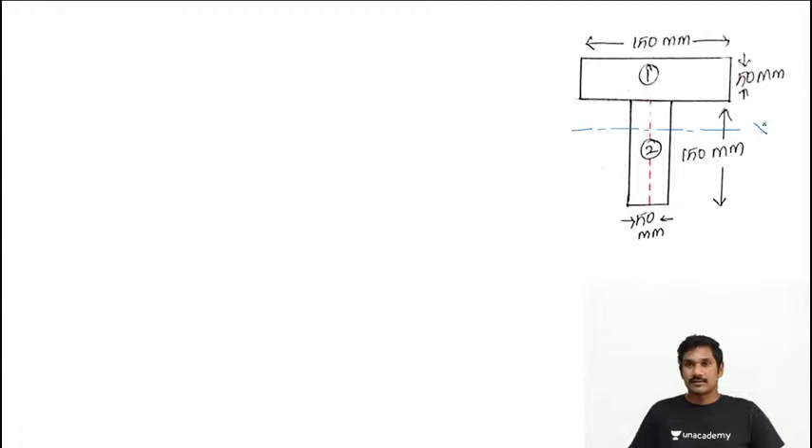After drawing the XX axis, find whether it is symmetry or not - find the section which is symmetrical about XX and YY axis. If you check about YY axis, yes, the T section is symmetrical on both sides. But if you check about XX axis, no, it's not symmetrical, because on top side we have a flange, and on bottom there is nothing. So about the T section, it's not symmetrical about XX axis.

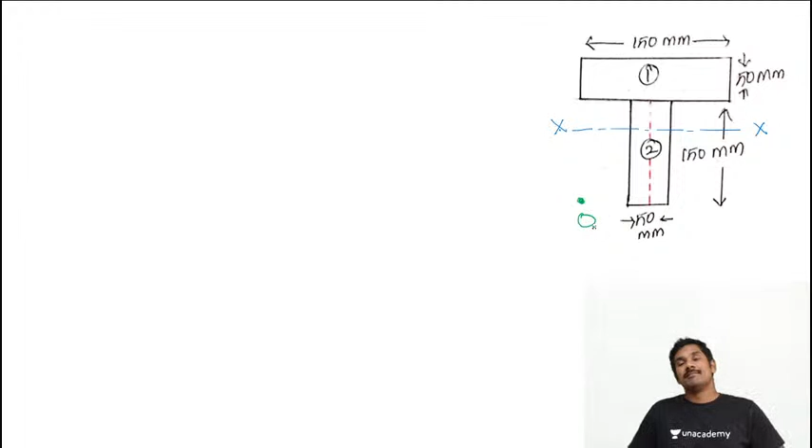According to that, the next step is to mark the origin point O. Next thing, find the area.

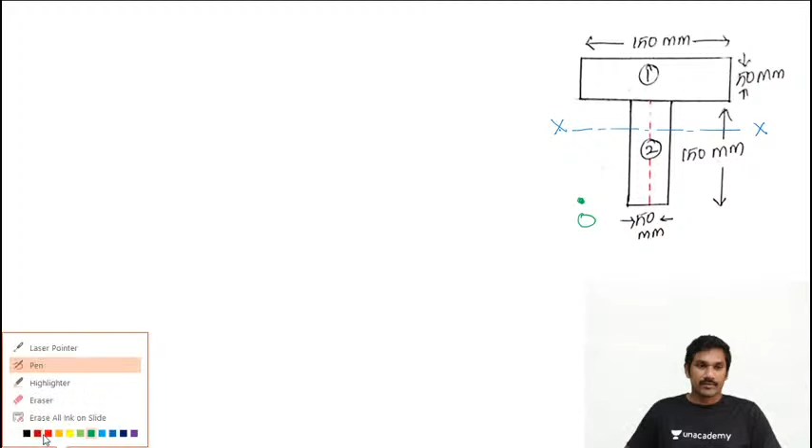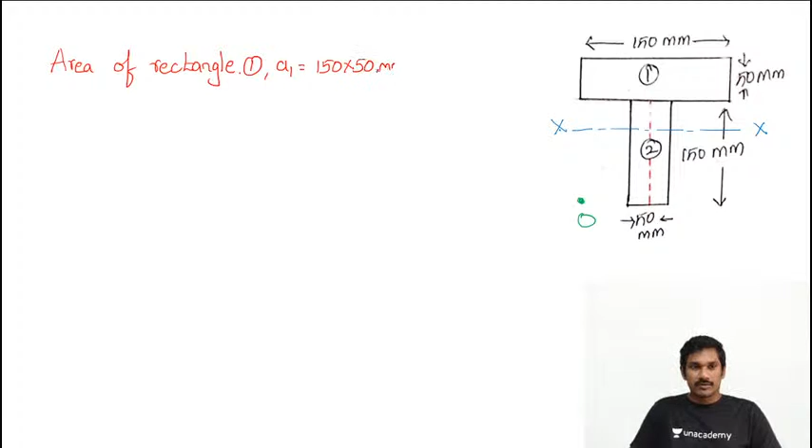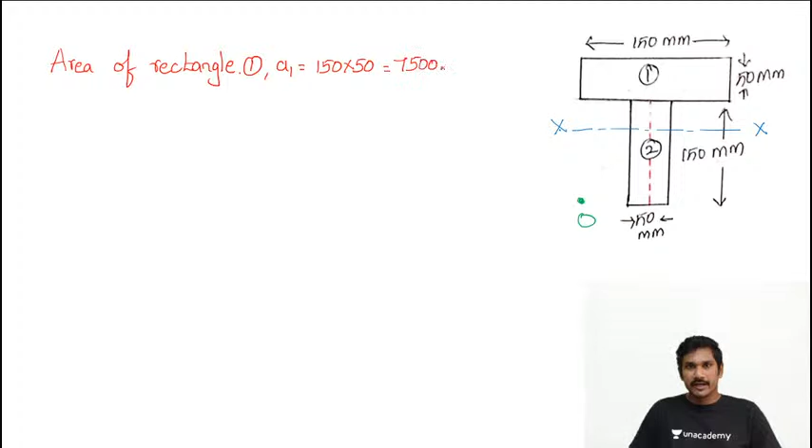Area of rectangle 1, A1, is equal to 150 into 50, that is 7500 mm square. Next, area of rectangle 2, A2, is equal to 150 into 50, that is 7500 mm square. That's the first work.

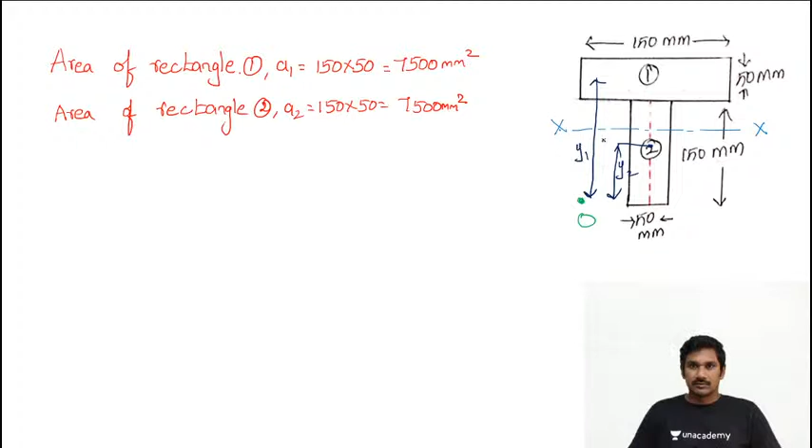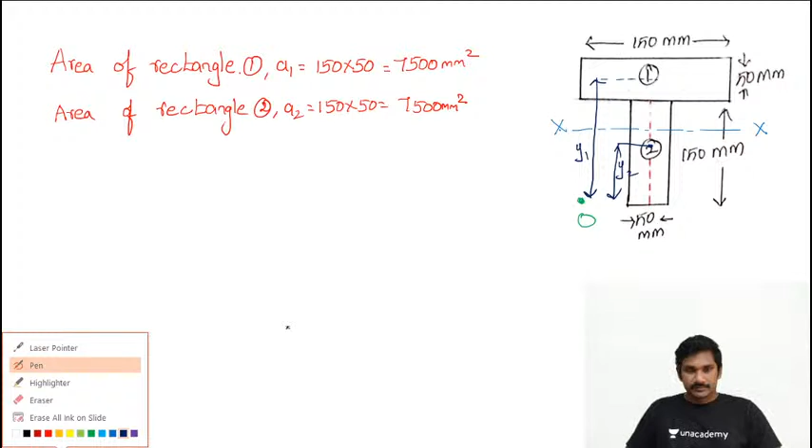Next work is y1 and y2. If this is the CG, then you have to calculate y1 and y2. y1 means from the origin O to 150 plus 50 by 2, that is 25, so it is 175 mm. Y2 value is 150 by 2, that is 75 mm.

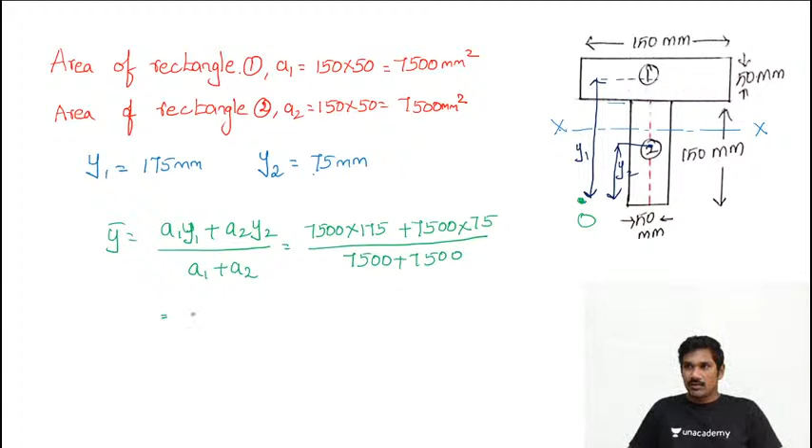Based on this, now calculate the y bar value: y bar equals a1 y1 plus a2 y2, divided by a1 plus a2. So the values are 7500 into 175, plus 7500 into 75, divided by 7500 plus 7500. So the y bar value is 125 mm. Now what is this 125 mm? From the origin, the height of x axis is 125 mm.

And exactly at the meeting of x and y axis, you get the center of gravity of the total section. So now you have calculated the y bar, and from there the CG of the whole T section is calculated. So well and good, nice.

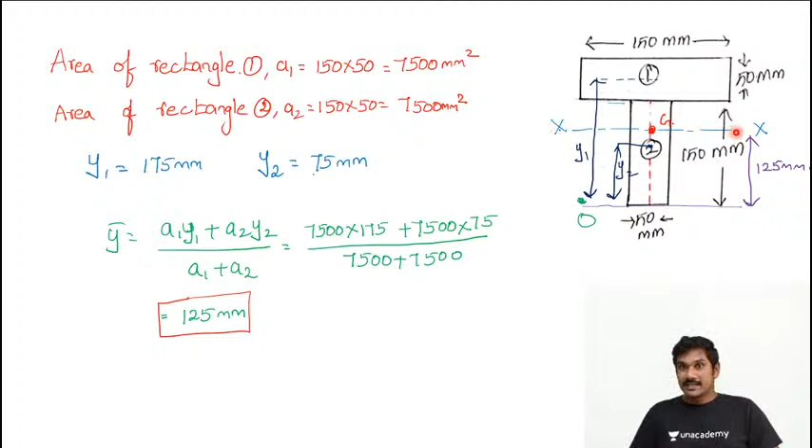Now what you have to do - you have to calculate the moment of inertia. The first step, we have calculated the center of gravity, now we move into moment of inertia. For that, again we split into two rectangles, rectangle 1 and rectangle 2, and we do it for both axes, about x axis and about y axis. About y axis, the component is symmetrical so it's easy to calculate, but about x axis it's not symmetrical. So let us calculate it here.

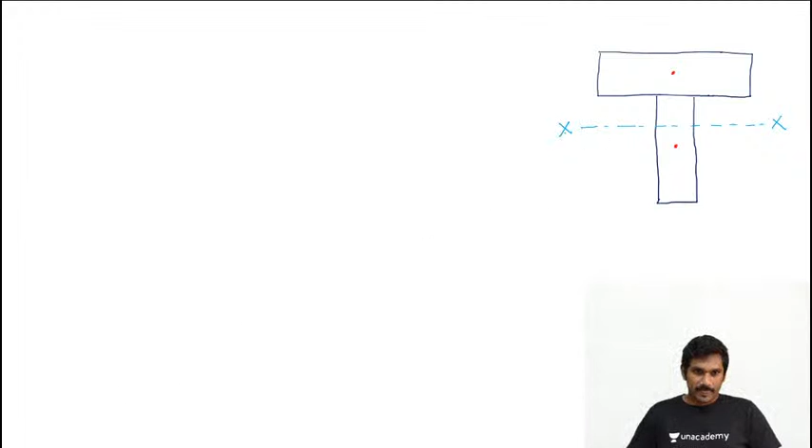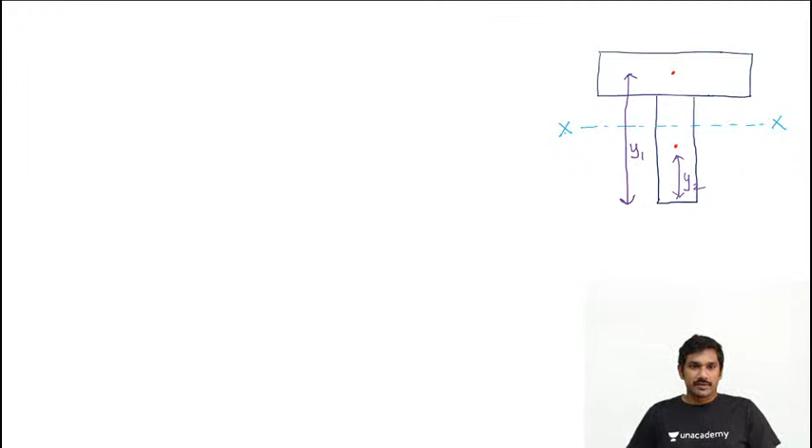So xx, y2, y1. This height is 125. 175 and 75. So now it's clear, so it's easy to do it.

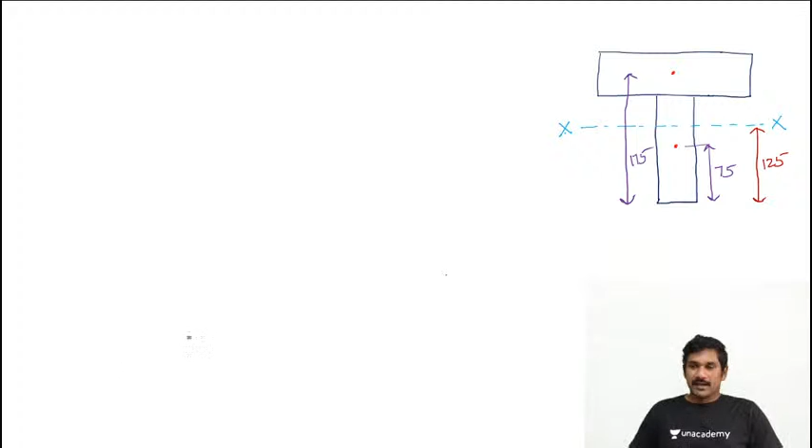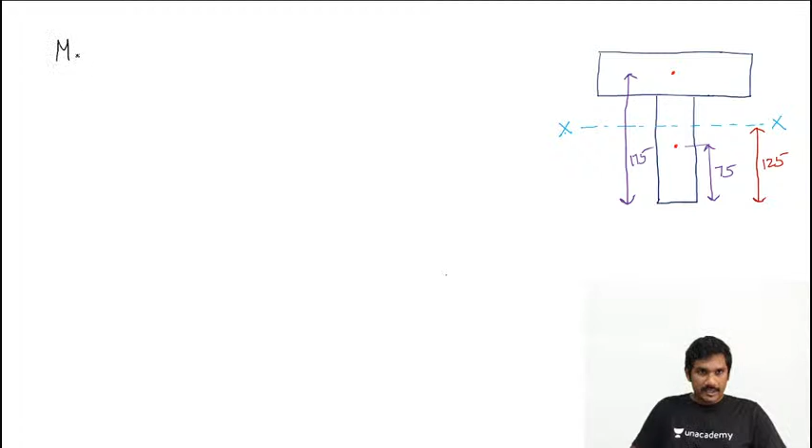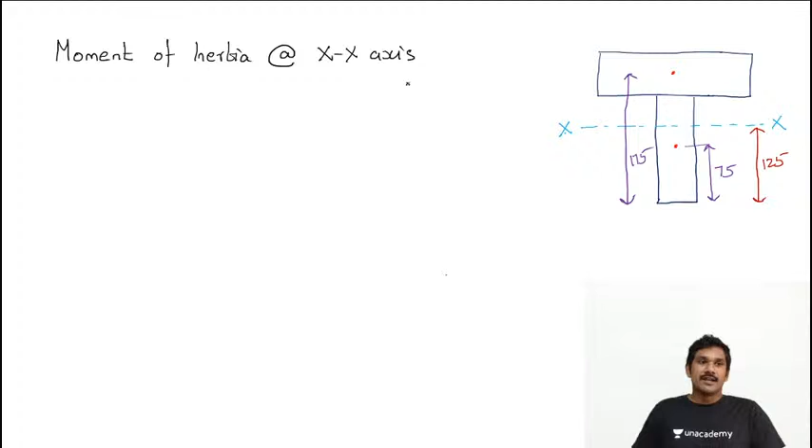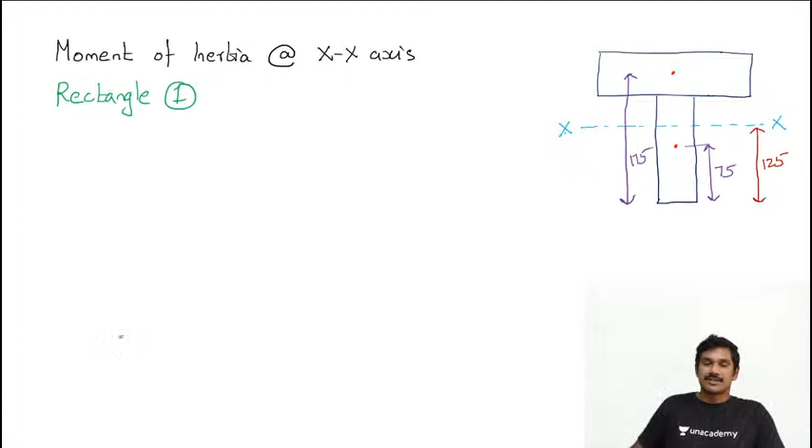Now going to moment of inertia. Before moving to moment of inertia, first we are calculating moment of inertia about x-axis. Our first approach is about x-axis alone, we are not going to do y-y first. Our first aim is to find it about x-axis. For that, the first step is rectangle 1 - in the x-axis calculation, the first step is about rectangle 1.

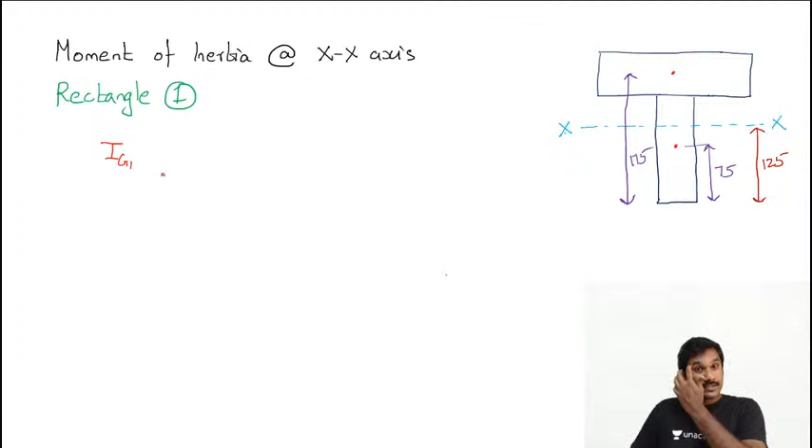First, IG1. What does IG1 represent? Moment of inertia about its own center of gravity of rectangle 1 about the x-axis.

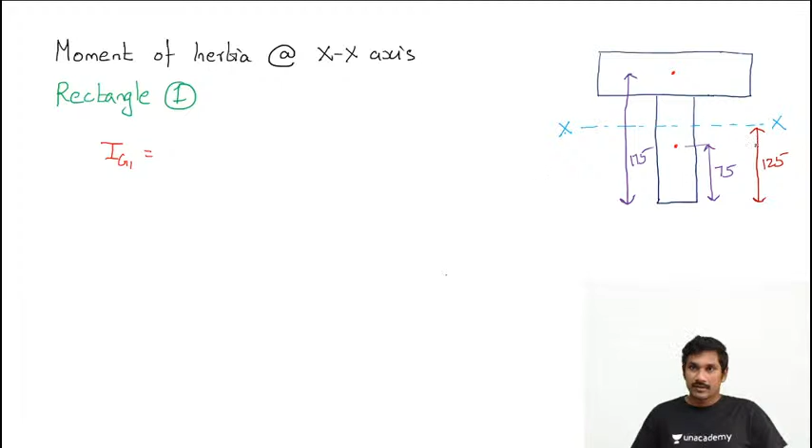So rectangle 1 is here, rectangle 1, rectangle 2, right? So rectangle 1 about its own CG is here, and rectangle 1 about its own CG from the x-axis. That's the first point.

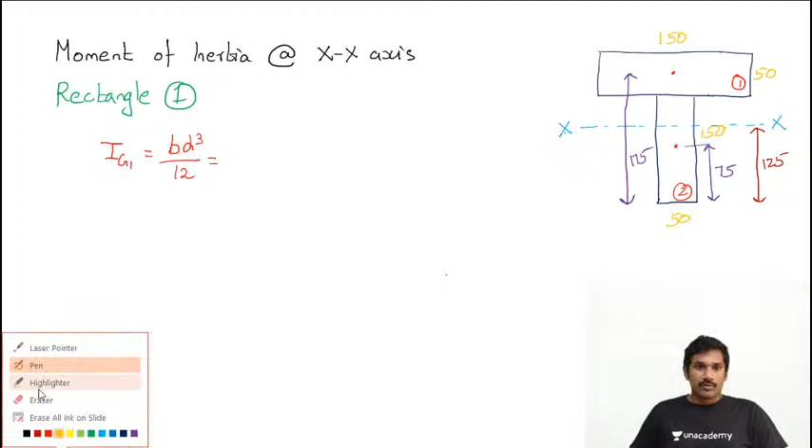About its own axis means BD cube by 12, where breadth and depth values are 150 and 50. So this is 50 and 150. Now, 150 into 50 cube, that is breadth into depth, 150 into 50 cube by 12. So BD cube by 12 is the moment of inertia equation for a rectangle.

So from there, if you calculate it, you get the answer: 1.5625 into 10 power 6 mm power 4.

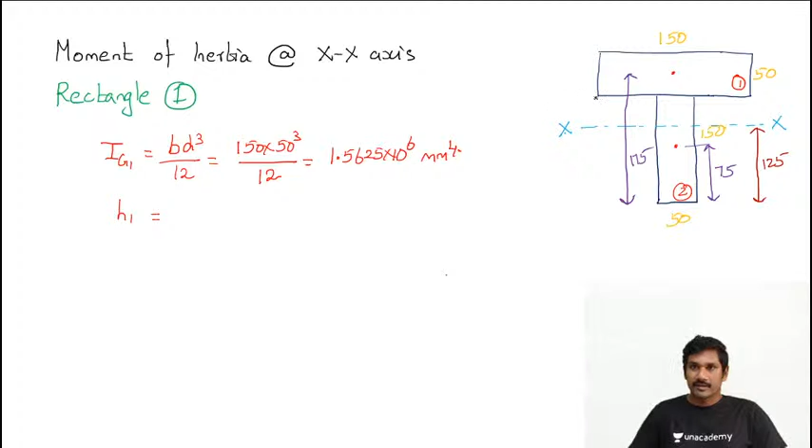Now, next you have to calculate H1. What is this H1 value? From the x-axis to the CG, this is H1. From the x-axis to the CG of rectangle 1, this is H1.

From the origin, the x-axis height is 125. From the origin, CG of the first rectangle is 175. So 175 minus 125 gives us the H1 value, which is 50 mm.

Now we have the value of H1. Finally, with these values, for rectangle 1 about the x-axis: IG1 plus A1 H1 square. So IG1 plus A1 H1 square is 1.5625 into 10 power 6 plus A1, the area, already calculated. Both areas are the same, that is 7500 into 50 square.

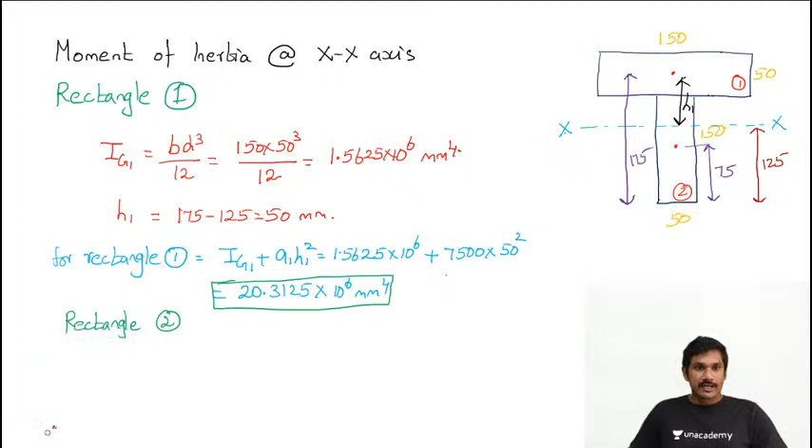Next, rectangle 2. For rectangle 2, same IG2 equals BD cube by 12, let's take it as B1 D1, this is B2 D2 because of rectangle 2. So for the second rectangle, breadth is 50, depth is 150. Which means 50 into 150 cube by 12, that is equal to 14.0625 into 10 power 6 mm power 4.

Next is H2 value. What is H2 here? From the x-axis up to the CG of the second rectangle. So this part is H2.

H2 means from the origin the x-axis is 125, and from the origin the CG of the second rectangle is 75. So how can we calculate? 125 minus 75, that is 50 mm. So now we have calculated these two values.

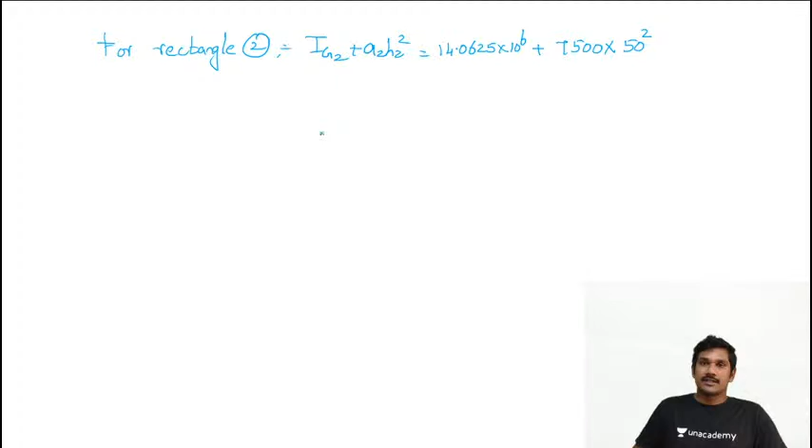So obviously for rectangle 2, IG2 plus A2 H2 square, that is 14.0625 into 10 power 6 plus second rectangle area 7500, H2 value 50 square. So the final value is 32.8125 into 10 power 6 mm power 4.

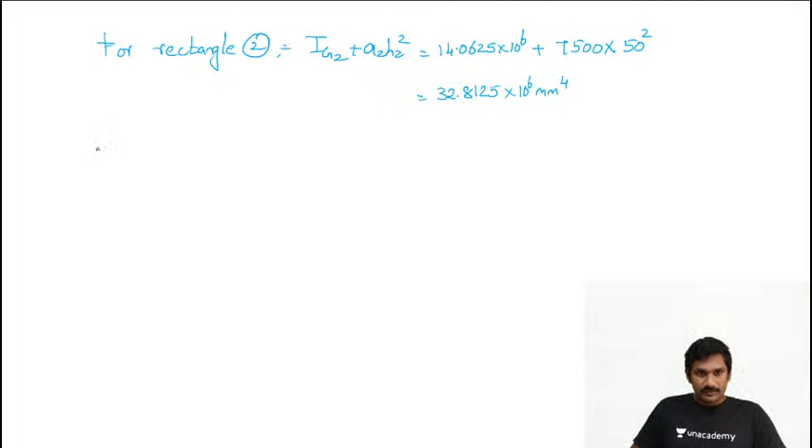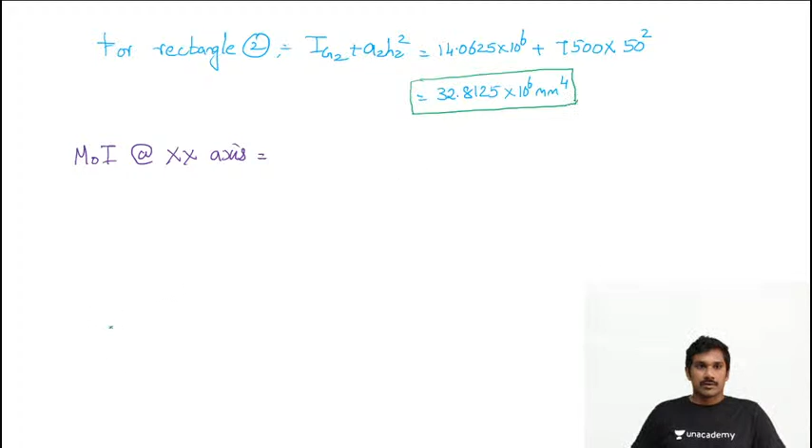So here the final answer, moment of inertia about the x-axis, is equal to first rectangle plus second rectangle. Which means 20.3125 into 10 power 6 plus 32.8125 into 10 power 6, that is equal to 53.125 into 10 power 6 mm power 4. So this is the moment of inertia about the x-axis.

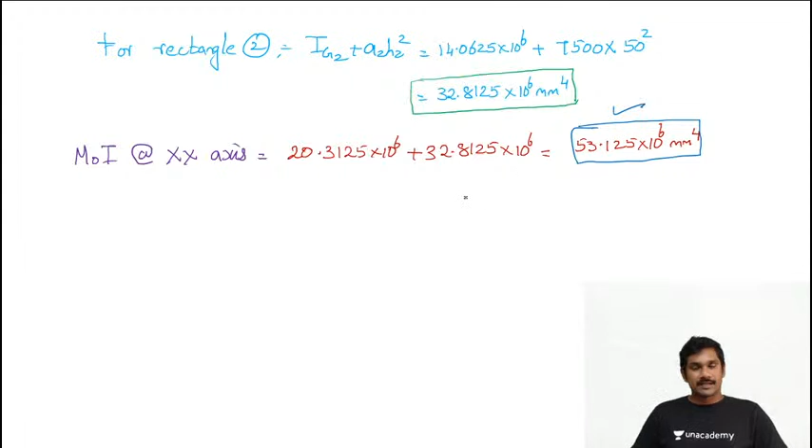Now next part is moment of inertia about the y-axis. This is a very simple one, because about the y-axis the component is symmetrical. So you don't need the value of h1 and h2. If h value is not there, then moment of inertia about its own axis is enough, so we can simply calculate.

So based on that, for rectangle 1, Ig1 is d1 b1 cubed by 12, because it is about the y-axis. About the y-axis, depth into breadth cube is the right representation. So depth is 50, breadth is 150, which gives 50 into 150 cubed by 12, that is 14.0625 into 10 power 6 mm power 4.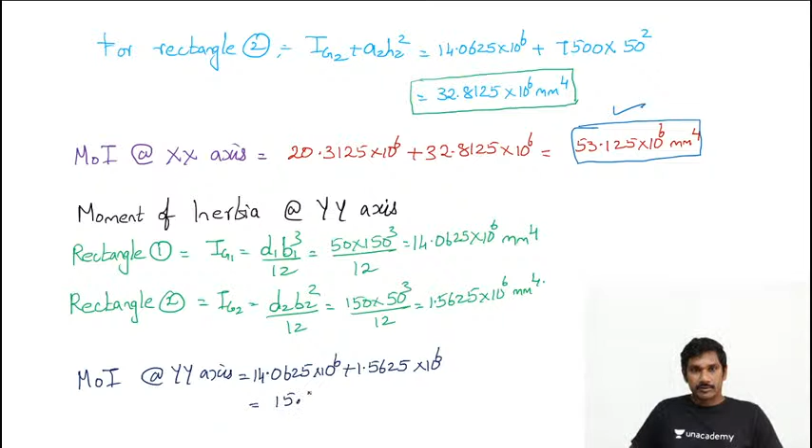So moment of inertia about the y-axis is the sum of these two: 14.0625 into 10 power 6 plus 1.5625 into 10 power 6. So the total value is 15.625 into 10 power 6 mm power 4.

This is the final answer here, right? So one of the simple methods, if you understand the concepts, it's very easy to answer. So it's simple and easy, but you have to do practice. Multiple practice will help you avoid errors. If you don't practice, errors may occur. So do practice to avoid errors.

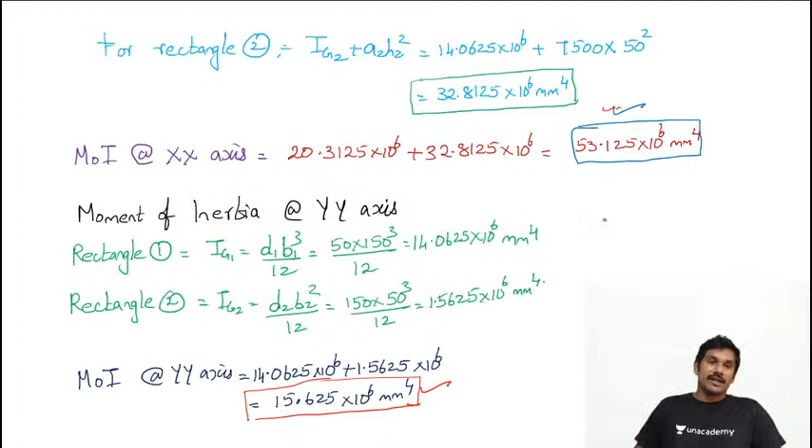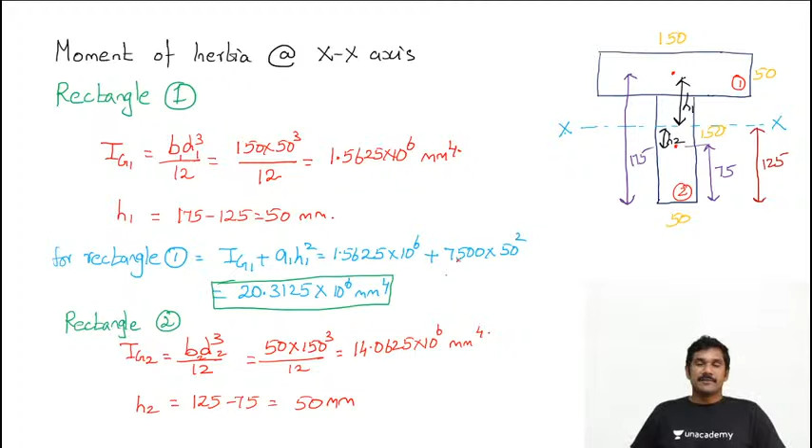So this is about the y-axis, and this is about the x-axis. In this question we calculated moment of inertia about both x-axis and y-axis. In case any other axis or plane is specified, how do we calculate it? Let's do the next problem.

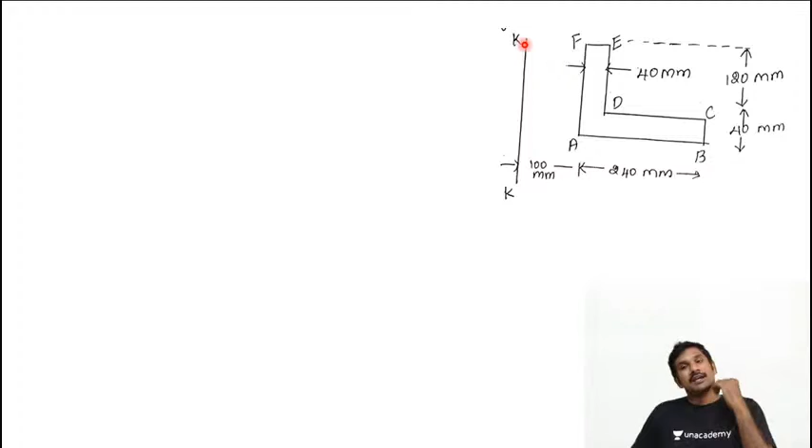So here you can see this is a specific problem where you have to calculate moment of inertia about KK. A specific plane is provided, and based on that plane you have to calculate the moment of inertia. That's the question.

Now, when a specific plane is provided, you don't need to find the center of gravity for the whole component. Just find the CG of each part on its own, that is enough. Let me do it.

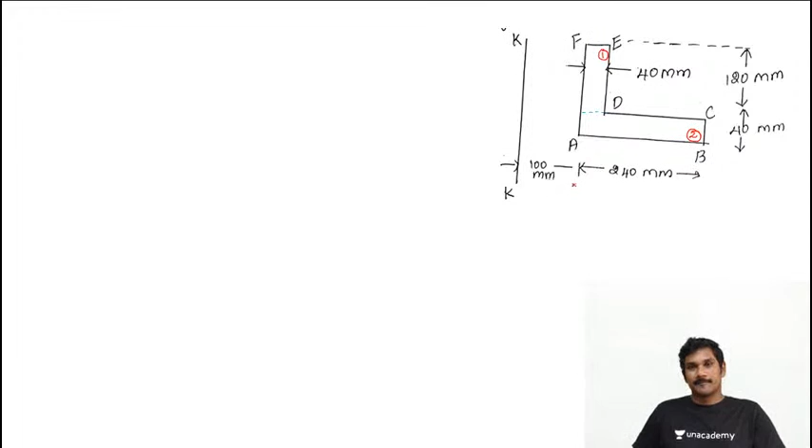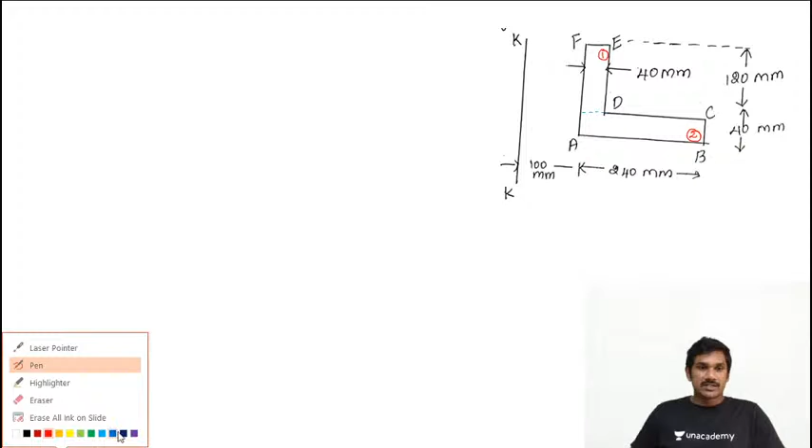First, split into simple shapes: rectangle 1 and rectangle 2 are marked. Next, draw the x and y axes to check symmetry. Since we don't need the overall center of gravity, we omit that step. Just find its own CG for each rectangle.

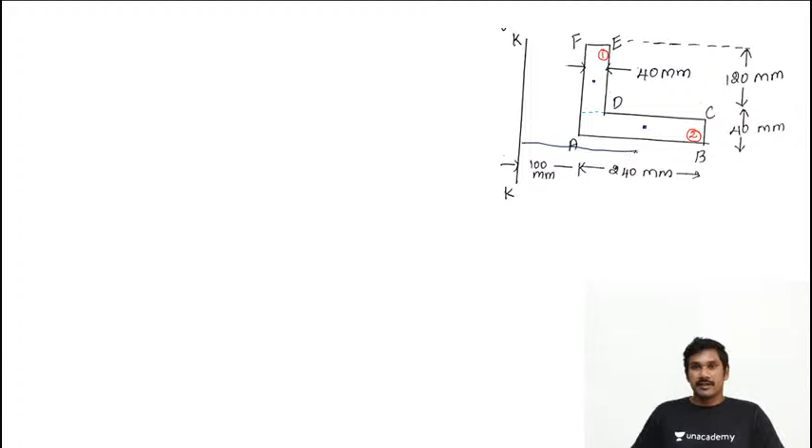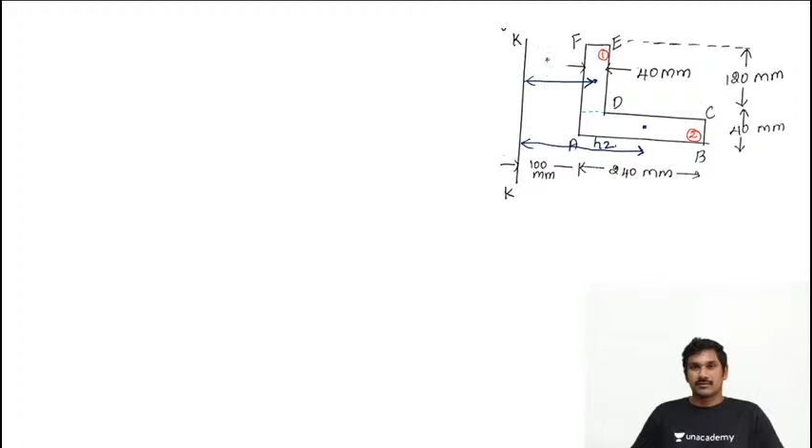Find the length H1 and H2. Once H1 and H2 are calculated, we find the moment of inertia about its own CG, and then use these values to calculate about KK. Let's move on.

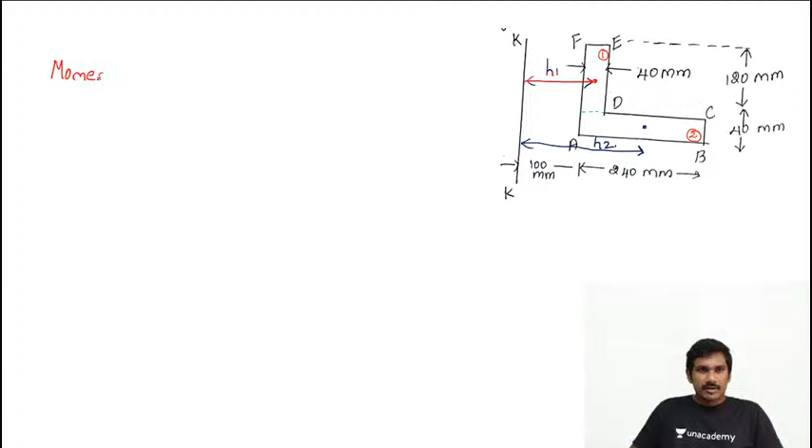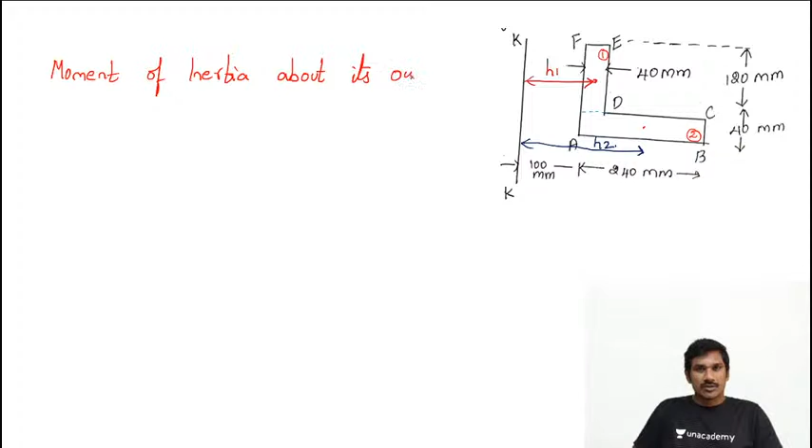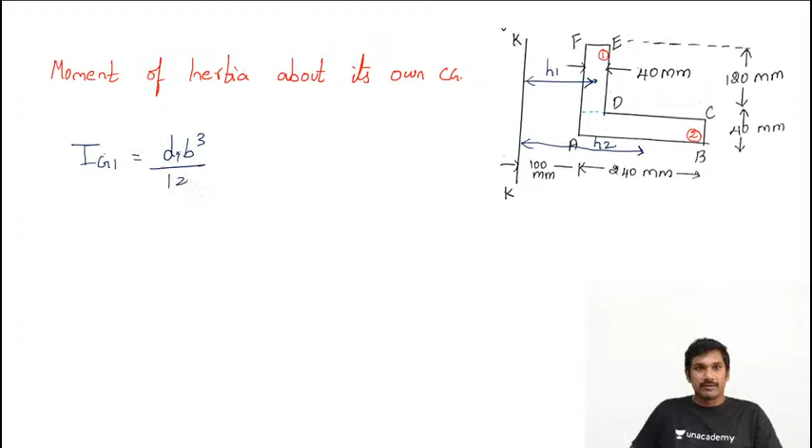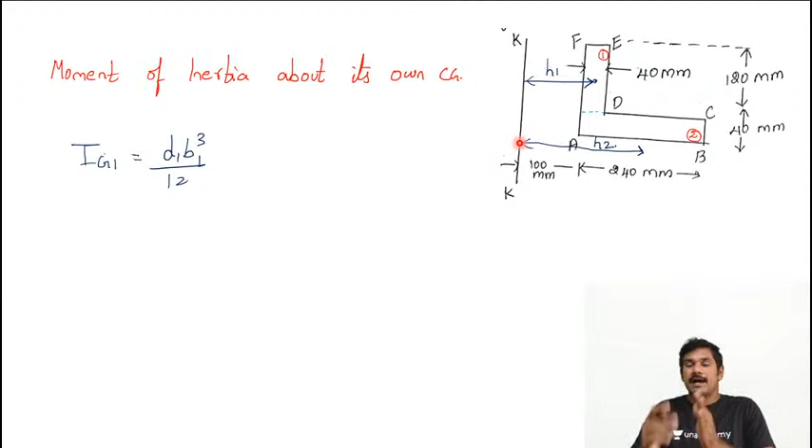Here, moment of inertia about its own CG is IG1, which equals dB³ by 12. We select dB³ because the KK axis is vertical, meaning it's parallel to the YY axis. If it's the YY axis, we use dB³. So depth of the first rectangle is 120 and breadth is 40. dB³ by 12 equals 640 into 10 cube mm power 4.

Same way, IG2 equals D2B2³ by 12. Depth 2 is 40mm, breadth is 240, cubed by 12. Once calculated, you get 46.08 into 10 power 6 mm power 4.

With these values, next we calculate H1, the distance from the reference axis to its own CG. From the reference axis KK to the surface is 100mm. Adding 100 plus 40 (total width), divided by 2, gives 120mm. Going to H2: from the surface, total distance is 240, divided by 2 is 120. So 100 plus 240 by 2 equals 220mm.

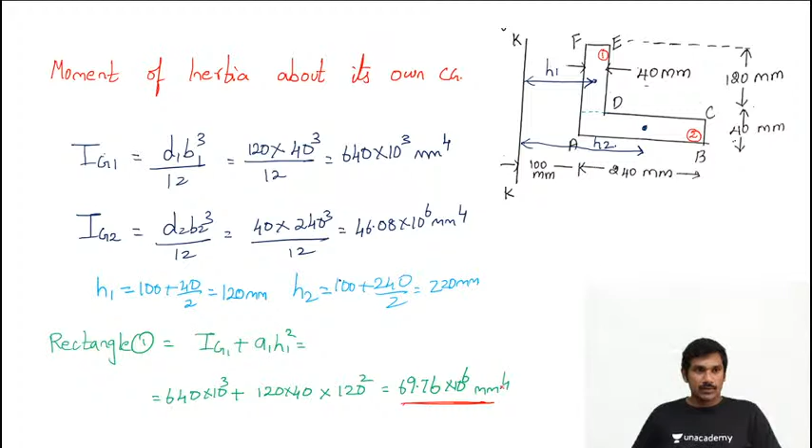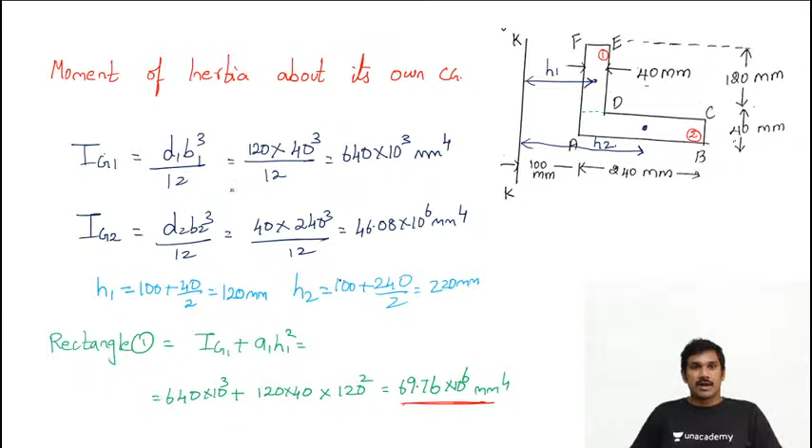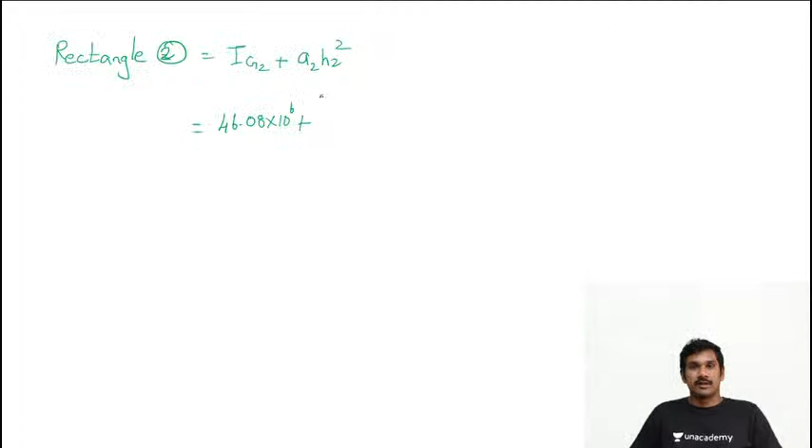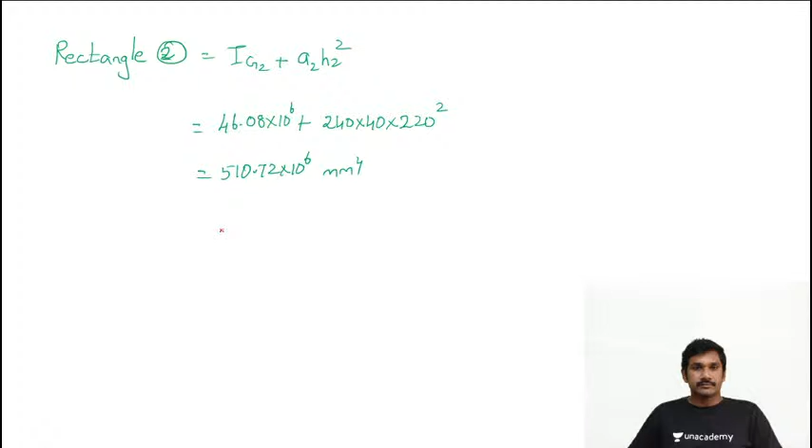Now rectangle 2: IG2 plus A2 H2 square. Area 2 is 240 into 40, and H2 value is 220. This equals 510.72 into 10 power 6 mm power 4. So the answer is 510.72 into 10 power 6 millimeter power 4.

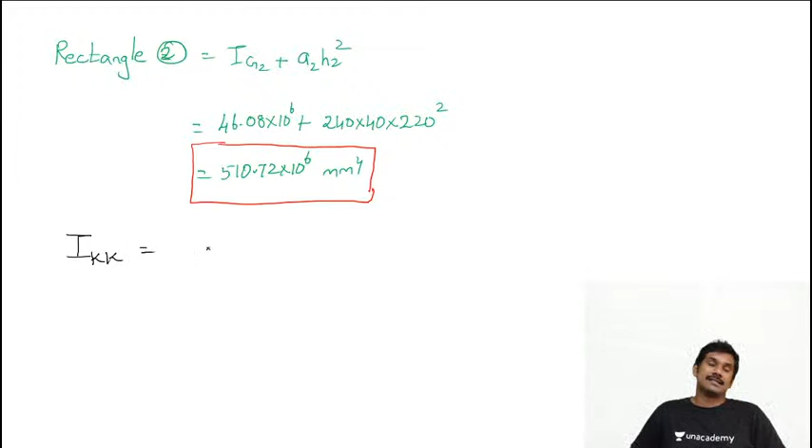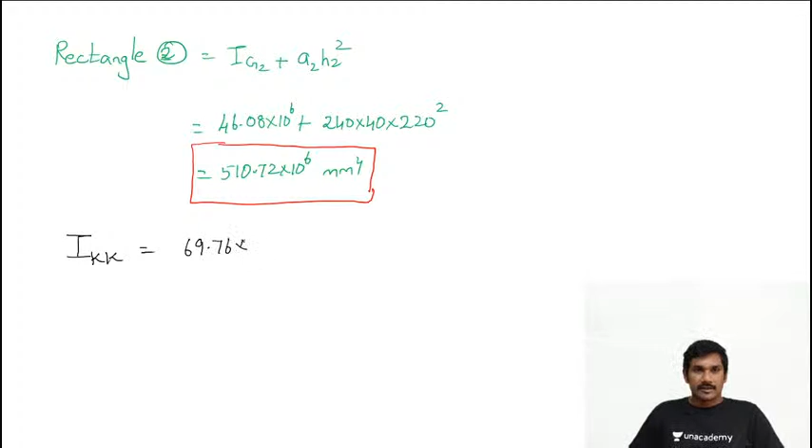Now the final component: moment of inertia about KK axis. This equals the rectangle 1 value, 69.76 into 10 power 6, plus 510.72 into 10 power 6. The total value is 580.48 into 10 power 6 mm power 4. So this is the moment of inertia about KK axis. Got it?

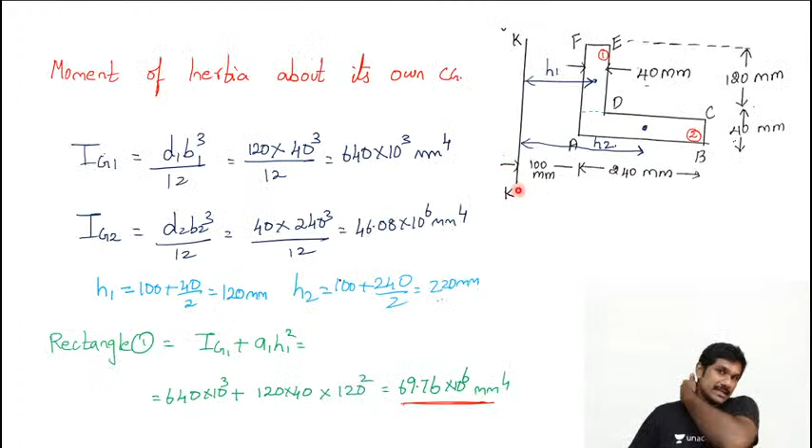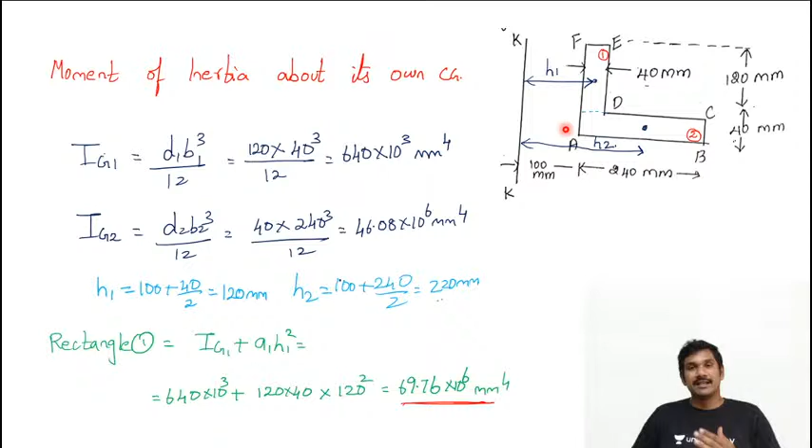Another simple question: if a specific axis is given, how do we calculate it? If a specific axis is given, you don't need to calculate the x-axis or y-axis or center of gravity separately - directly you can go for moment of inertia.

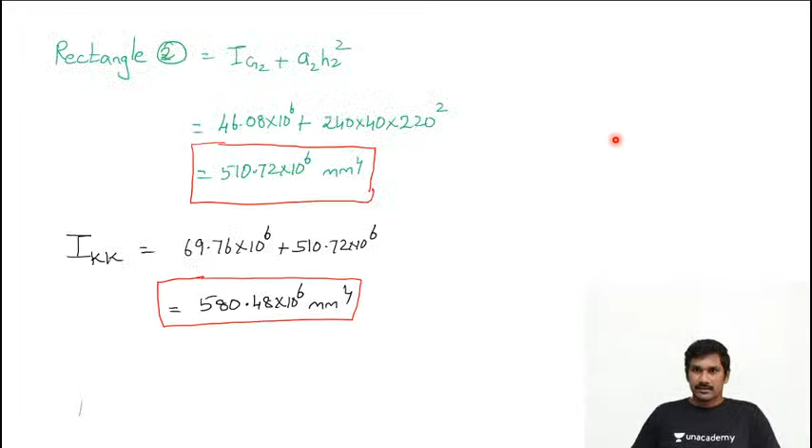Let's do one more simple question aloud. Here we are going to find out moment of inertia about only x-axis. We are going to calculate only about x-axis, right?

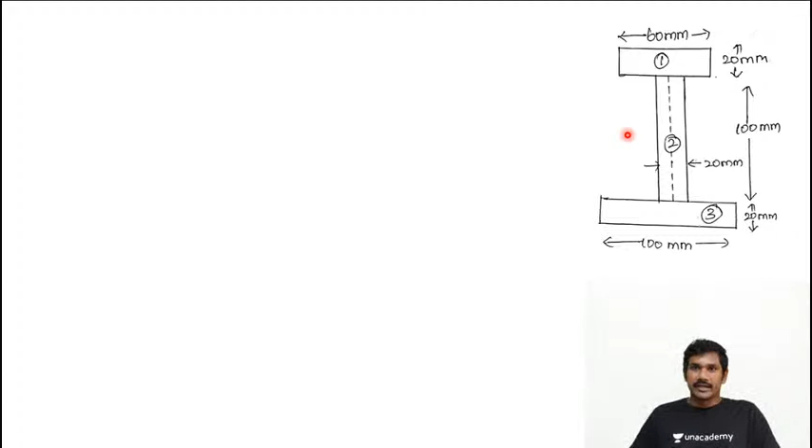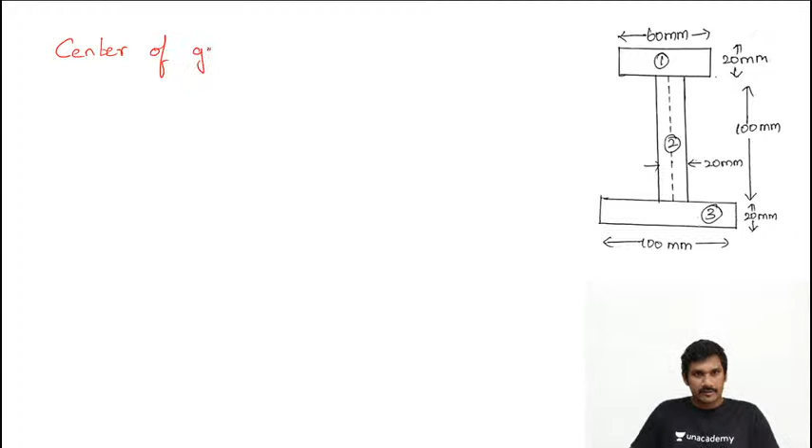Good, great. So first let's find center of gravity. For that I'm quickly moving here to find center of gravity.

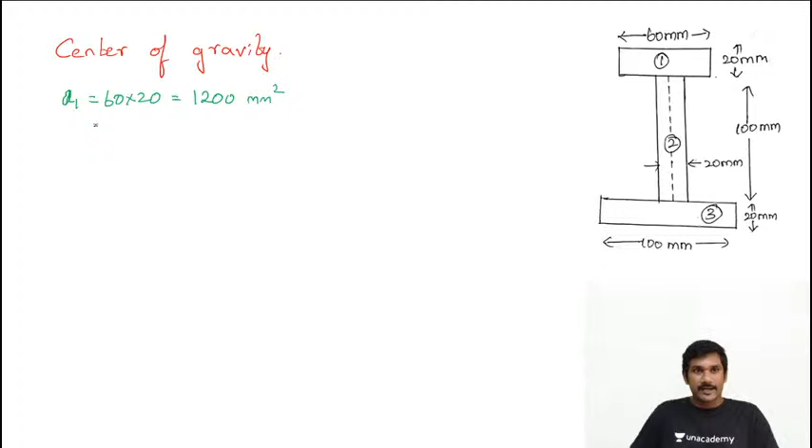First find A1, that is area of rectangle 1, that is 60 into 20, so 1200 mm square. A2, area of rectangle 2, that is 100 into 20, that is 2000 mm square. Area of rectangle 3, 100 into 20, again 2000 mm square.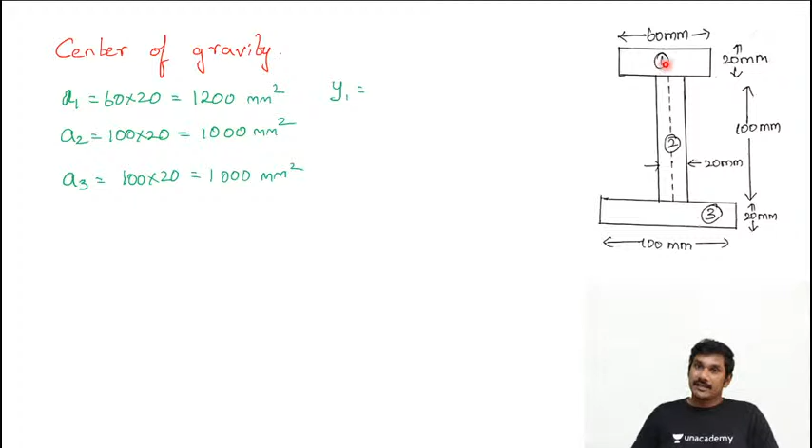Next, y1 value, that means from the origin to the CG. So here from the bottom, 20 plus 100 is 120, plus another 20 by 2 is 10. So 20 plus 100 plus 10, totally 130 mm.

y2: so 20 plus 100 by 2, that is 20 plus 50, that is 70. Y3 is 20 by 2, 10 mm.

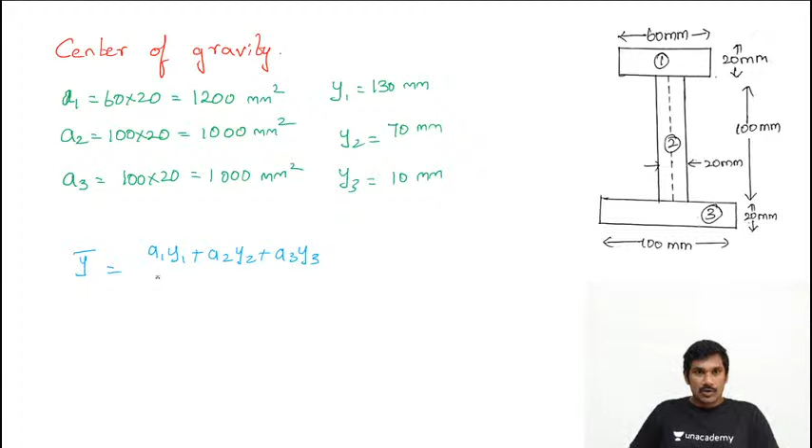Now with all these values, you can calculate the y bar, that is A1 y1 plus A2 y2 plus A3 y3 divided by A1 plus A2 plus A3. So 1200 into 130 plus 2000...

2000 into 70 plus 2000 into 10, divided by 1200 plus 2000 plus 2000, which is equal to 60.8 mm. So 60.8 means the position of x-axis is 60.8.

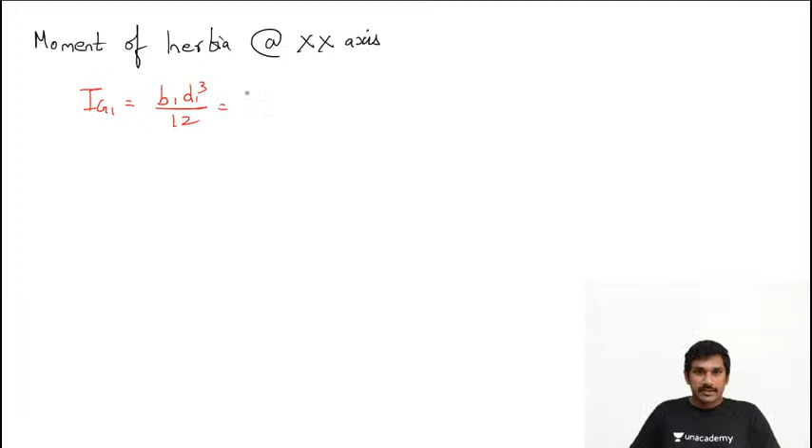Ig1 equals B1 D1 cube by 12, where breadth is 60, depth is 20. So 60 into 20 cube by 12, that is equal to 40 into 10 cube mm power 4.

Next, H1 value means from the x-axis to the point, that is to its own CG. Now we know that from the origin, height is 60.8, and from the origin to the CG we already calculated it is 130. So 130 minus 60.8, that is equal to 69.2 mm.

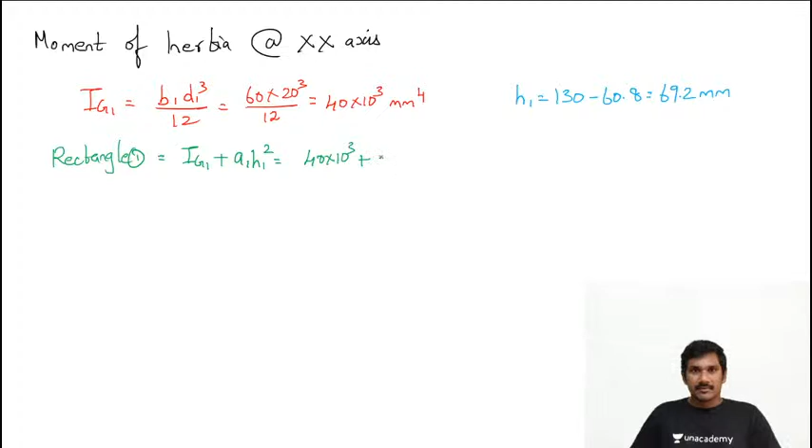Now you can calculate the value for rectangle 1, that is equal to Ig1 plus A1 H1 square, that is 40 into 10 cube plus A1 is area of first rectangle is 1200, times 69.2 square, which is equal to 5786 into 10 cube mm power 4. This is for the first rectangle.

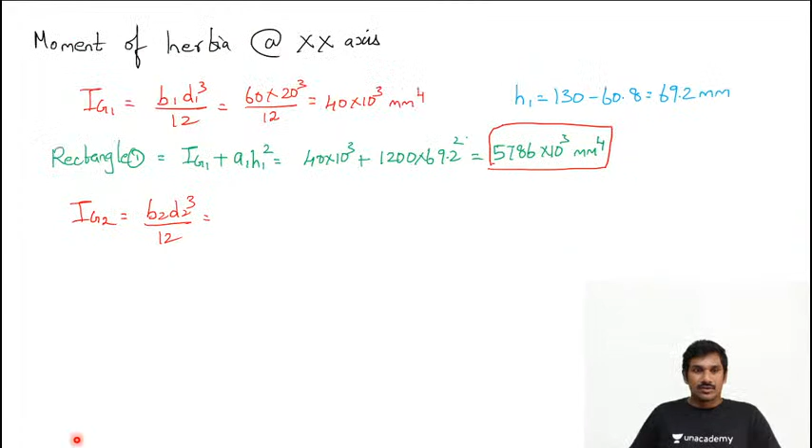Similarly, for second rectangle, IG2: B2 D2 cube by 12, where breadth is 20 and depth is 100. So 20 into 100 cube by 12, that is equal to 1666.7 into 10 cube mm power 4.

Next is H2 value, from x-axis to its own CG. So from bottom, this distance is H2, and this is H3. So from the x-axis to the CG of second rectangle, that is equal to 70 minus 60.8, that is 9.2 mm.

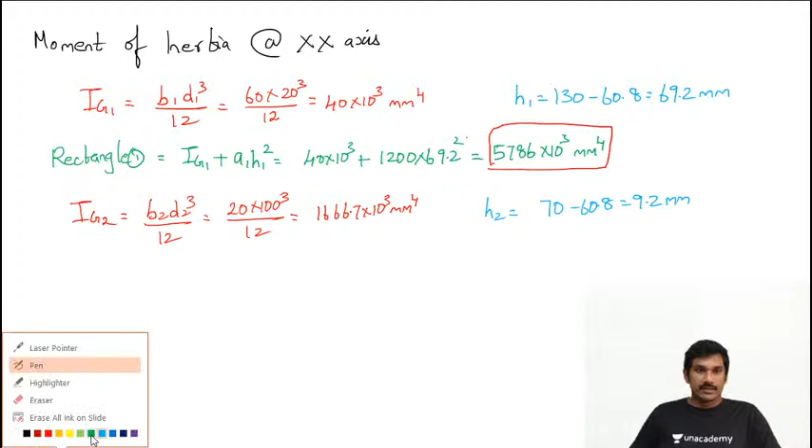So finally for rectangle 2, Ig2 plus A2 H2 square is equal to 1666.7 into 10 cube plus 2000 into 9.2 square, that is equal to 1836 into 10 cube mm power 4.

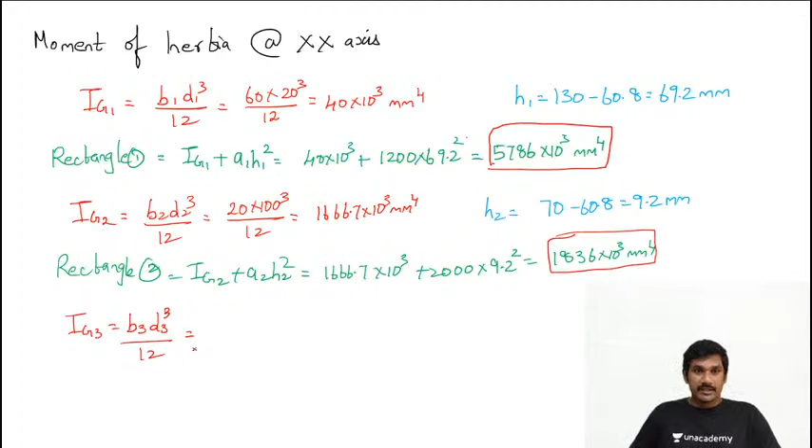Based on that, next is Ig3 for third rectangle, B3 D3 cube by 12. So B3 D3 for the third rectangle, breadth is 100, depth is 20. So 100 into 20 cube by 12, which gives 66.7 into 10 cube mm power 4.

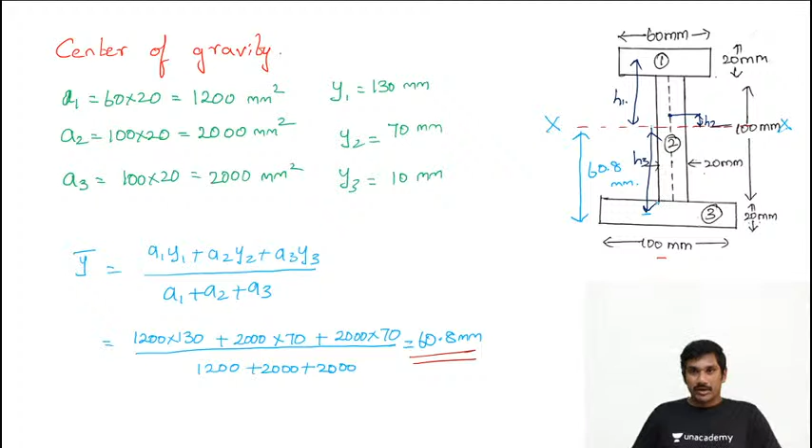Now H3 value is from x-axis to the bottom, and it is 60.8 and 10. So 60.8 minus 10, that is 50.8 mm.

Based on that, for rectangle 3, the IG3 value is 66.7 into 10 power 3 plus area 2000 times H 50.8 square, so the value is 5228 into 10 cube mm power 4. This is the third rectangle value.

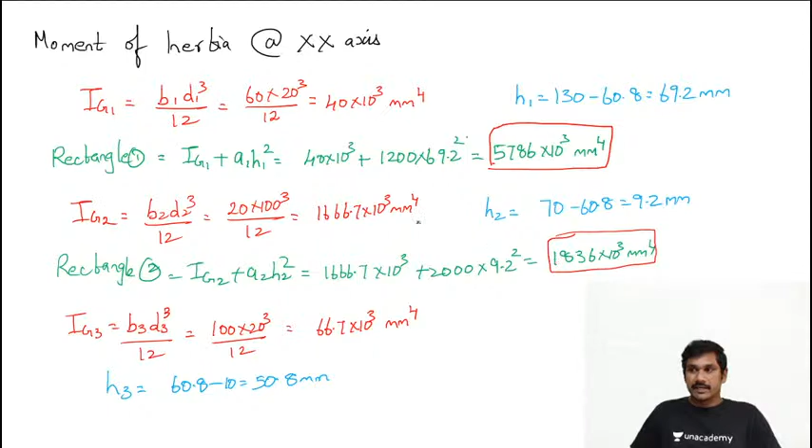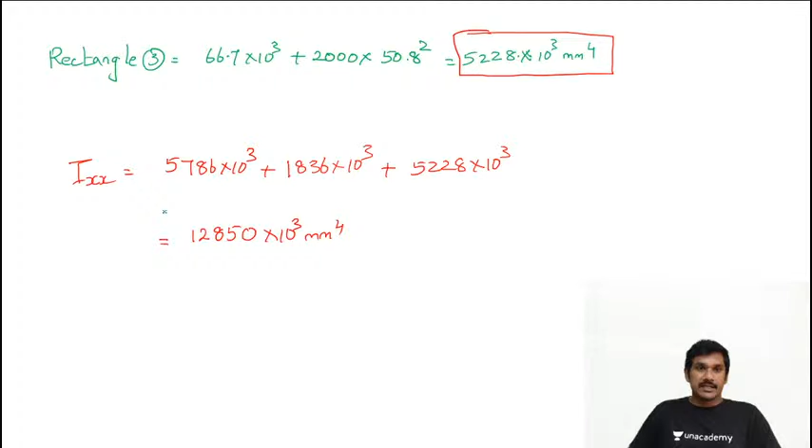So about IXX axis, if you substitute: 5786 into 10 power 3 plus 1836 into 10 power 3 plus 5228 into 10 power 3, the total answer is 12,850 into 10 power 3 mm power 4. This is the total moment of inertia about XX axis for the I section.